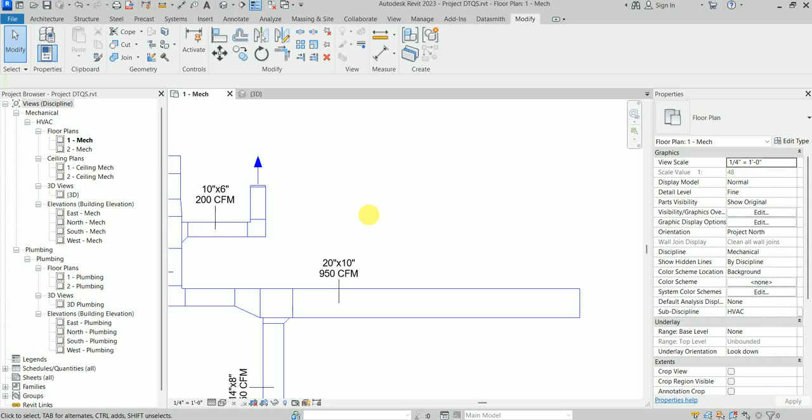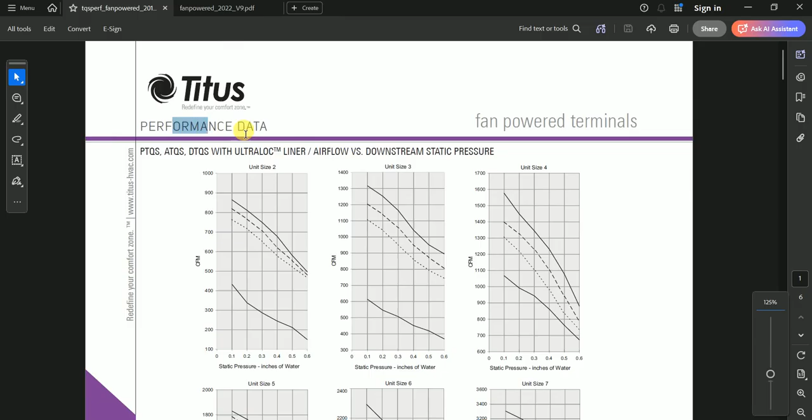This video is about Titus DTQS electric heat VAV fan power terminal box, and here we have its tabulations of this product, and this is the complete dimension, and these are the different sizes and their description.

So this video is about the features of the family I've created. Although this family can be found on the Titus website, I just wanted to create the family in my own version, my own kind of family.

So I have the family, and the thing is that most people make use of these fan power terminals, or even the VAV boxes without fan powers, just like a mechanical equipment category. But I make these families as a duct accessory, and the reason why I make use of duct accessory is why I wanted to make this video and show you the feature of how it is very easy and convenient to use duct accessory for these families instead of mechanical equipment.

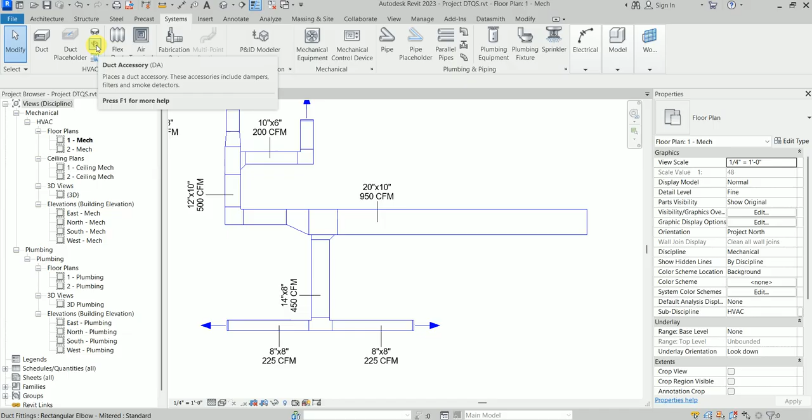So if I click here on duct accessory, or even if I press DA by keyboard, it's going to bring this family here. Now the thing is, in this family, I place it here.

You can see there it has this inlet, and from here it's outlet. So this side is coming from the equipment and this side is going to the terminals, right?

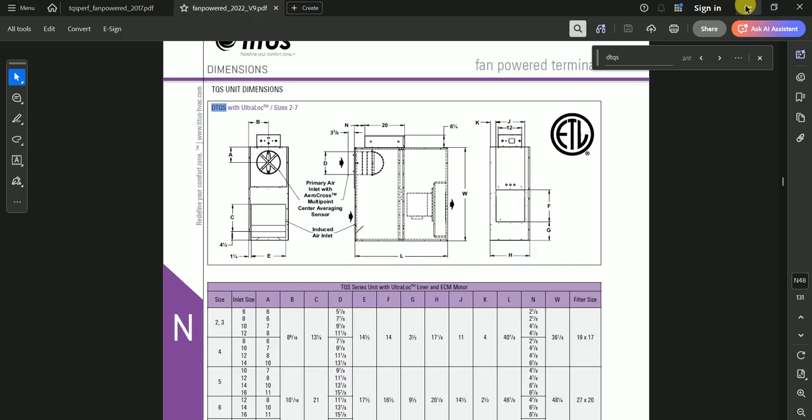So the thing is, here you might have noticed that both of these connectors are in line, and there's a reason why they are in line, and that's what I'll show in the video.

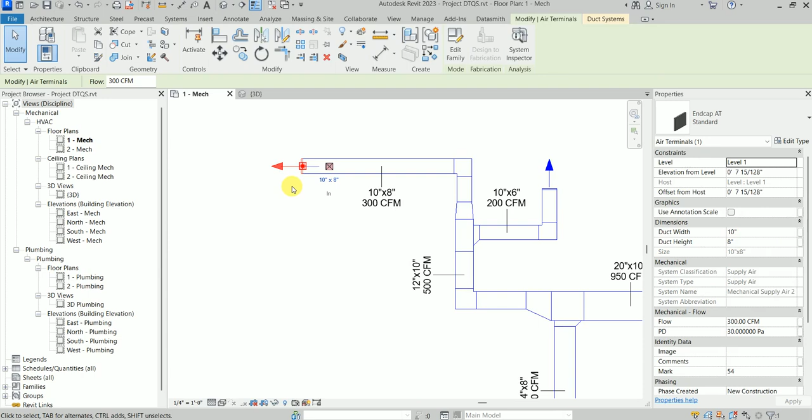So I have here the duct network. All right, so as you can see, these are my terminals. All of these with the arrows are my terminals. I just use them conveniently to bring the airflow inside my duct. As you can see here, all of the ducts have the flow rate and the sizes mentioned here.

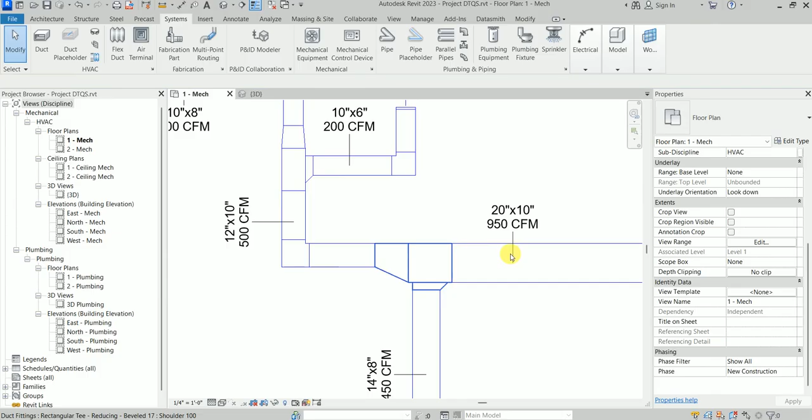And also I have these duct fittings which are being selected from the proper ASHRAE table in here, like here, and then here also I have this SR513, and this one the bullhead tee here properly.

And so if I go to duct systems, I'm having the proper calculation of the static pressure of this complete part of the network.

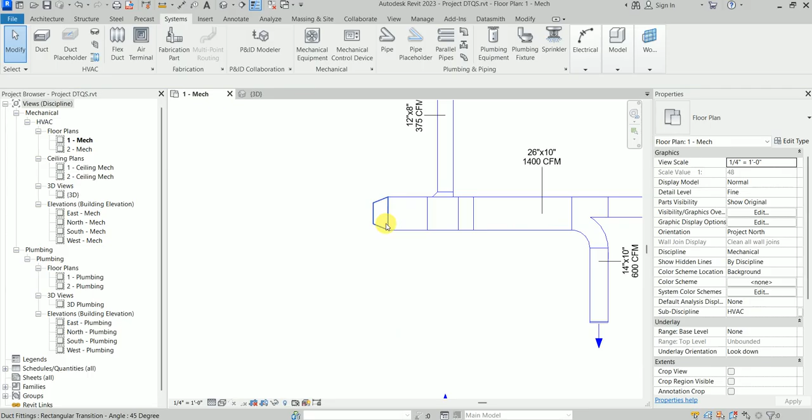Then I have another network here, right? And here also I can bring my flow rate and the duct size. These are my terminals with the airflows.

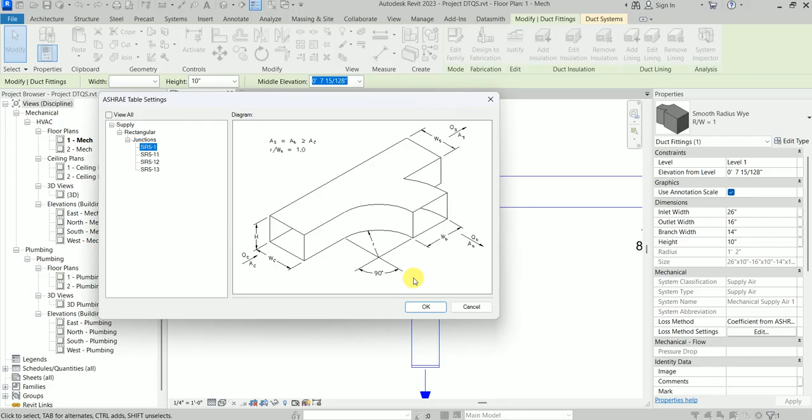This is another fitting. This is a smooth radius wye, right? And then this is the bullhead T.

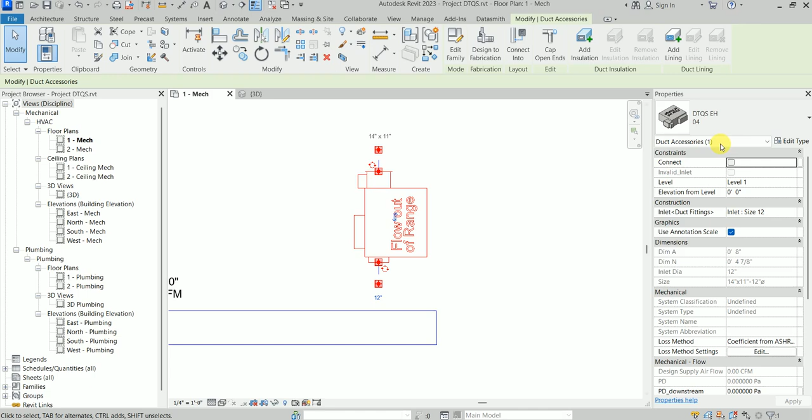So let's get back to here, this DTQS. So here I have sizes from 2, 3, 4 up to 7. So I have like 6 sizes of this, which I have made all of the sizes, right? So I have from size 2 to size 3, all right, size 4 and 5 and 6 and 7, like so.

So I wanted to just show you the features of this family, what I have made here. This is the DTQS family from the Titus fan power terminal box.

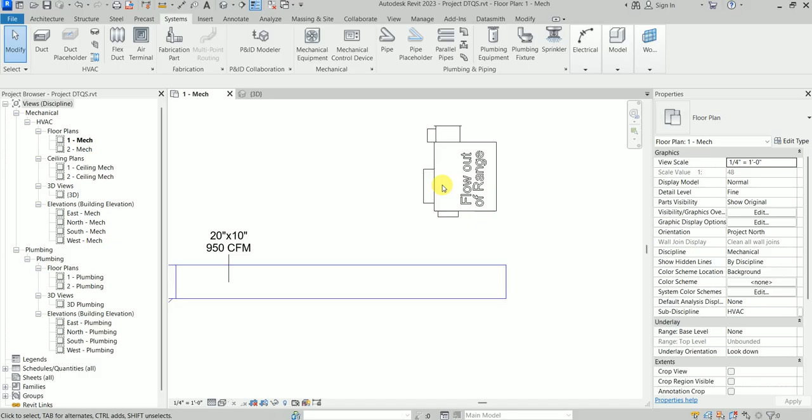Now the thing is, let me show you first all of these sizes, how they have different inlet sizes. So the inlet is here, right, with the round connector. So the inlet can be different on one particular size.

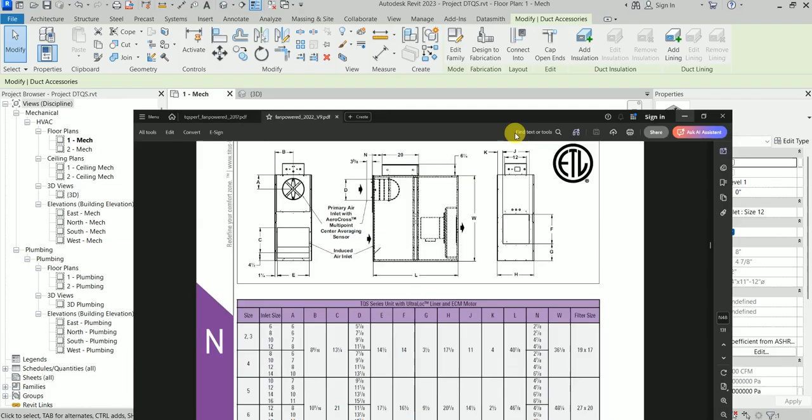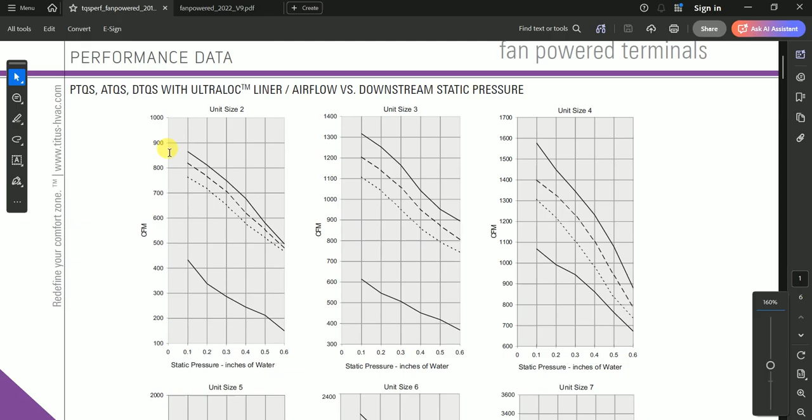For example, for size 2 and 3, they can go from 6 to 12. So I have here. And then we also have to select it based on the flow rate range given by this chart, right? So we have flow rates. For example, this one goes from about 500 CFM to something like 860 or 870 CFM, right?

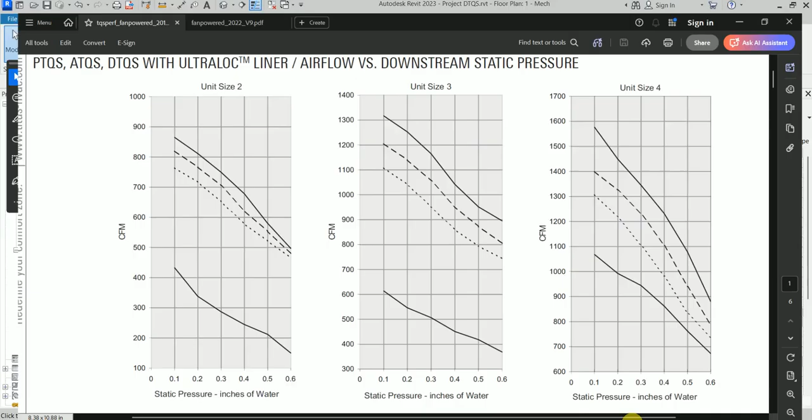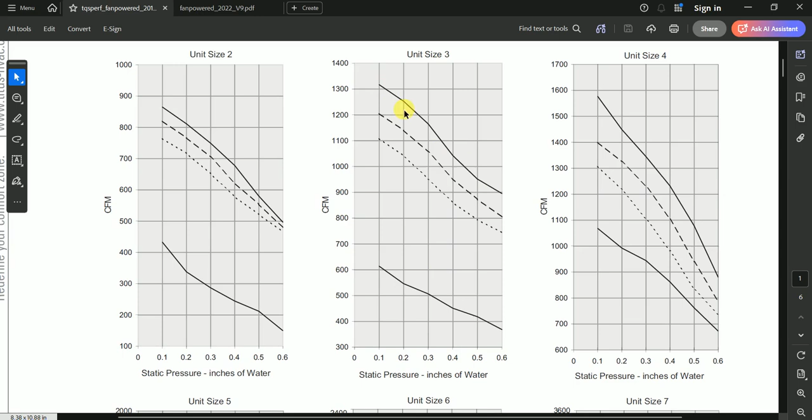So this covers everything regarding the flow range and everything regarding the inlet size. Now the thing is, let's say since I have this 950 CFM here, I'll be selecting, for example, and I don't need to look into this again and again, because all of this information I have given inside the family as minimum flow and maximum flow in the type. So if I select this, all right, so I have the minimum flow and the maximum flow.

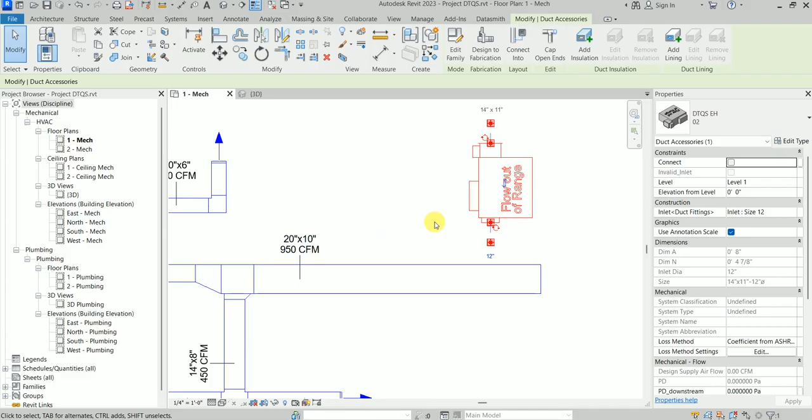As you can see, this flow is out of range, so I'll go to type 3. Type 3 is from 900 to 1315, so I can connect it here. I'll delete this and bring a new instance, and from here I'll select size 3 and bring it here.

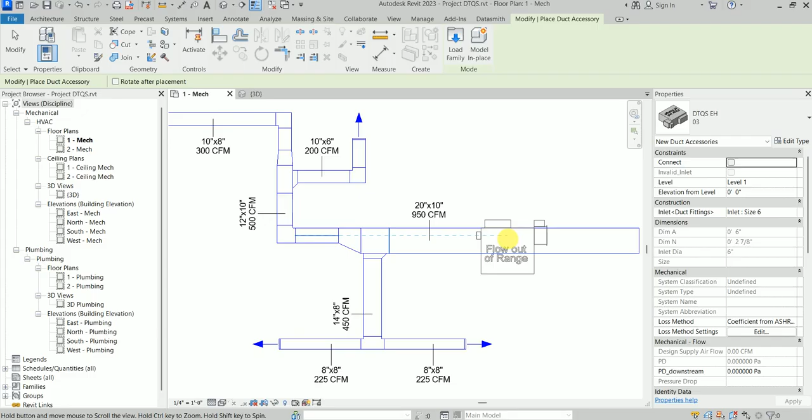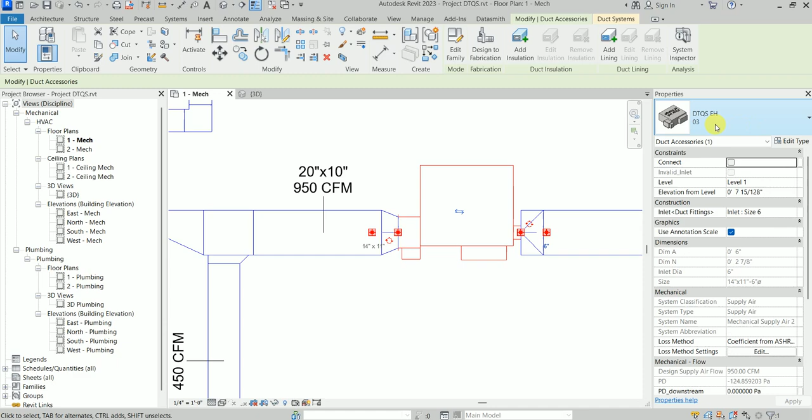The important point to note here is that the round connector should be towards the equipment and the rectangular should be towards your air terminals. So I'll bring it here and click inside and it will be connected. Now you can see on this side I have round duct, and on this side I have rectangular duct.

And because this is size 3, I can have different inlets here from 6 to 12 inch. So I can select this from here, 6 inch, 10 inch, and then I can select 12 inch.

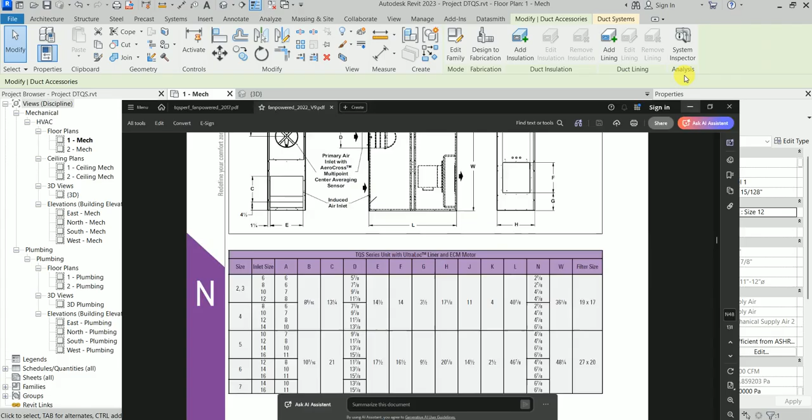I've also made a feature in this family that if you select it and look at the inlet size drop down menu, it will show you all the sizes from 6 to 16 inch. But the thing is, this particular type only takes from 6 inch to 12 inch.

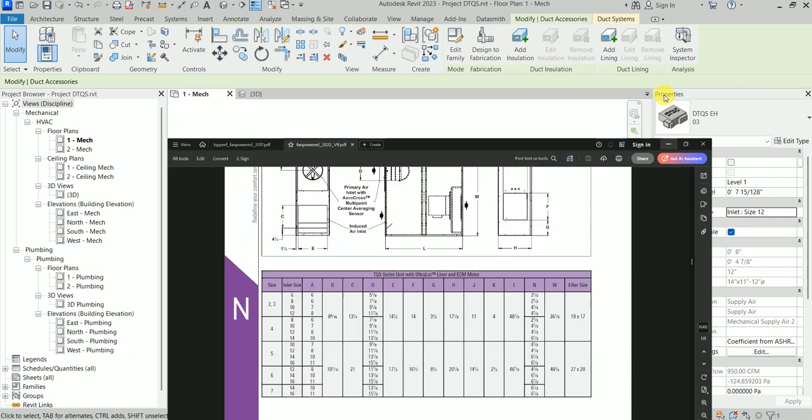So for example, if somebody by mistake chooses to go for 14 or 16 inch in this particular type, I have added a kind of indication that will give us a warning that a wrong inlet size has been used.

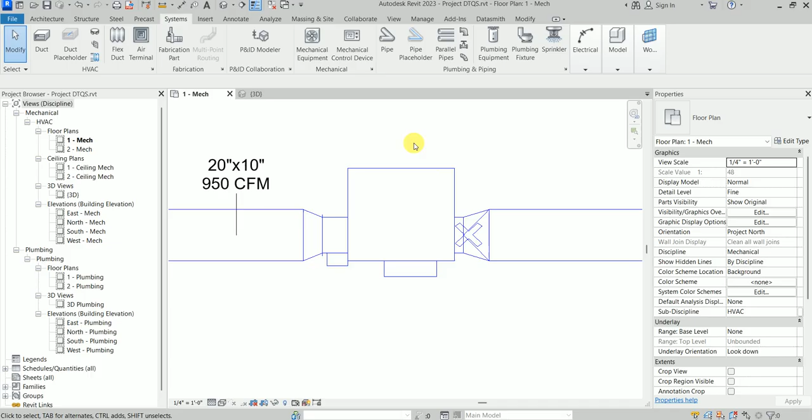So let's say I go to size 14. In that case, this cross appears here, and this shows up both in the plan view and in the 3D view - you can see this cross going all the way. This gives an indication that there's something wrong with the inlet size, which you have to correct. If you choose the proper size, this will disappear, like it did here.

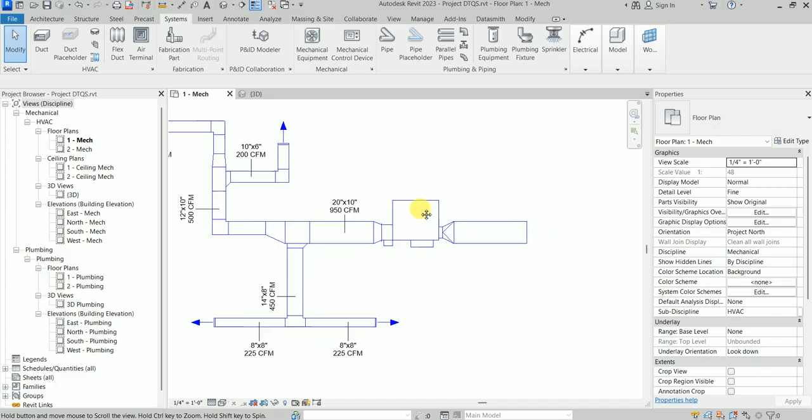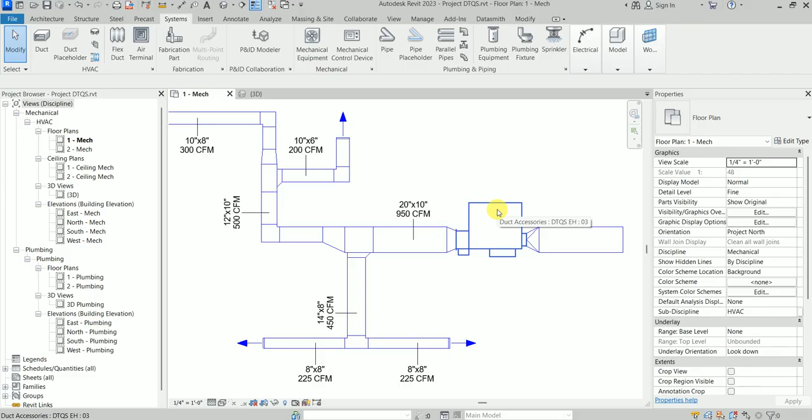Now the next thing is, like I showed you, the minimum and maximum flow rate here is 900 and 1315. But what if for this particular type the flow rate goes beyond this minimum and maximum range? If it's either less than 900 or more than this value, there will be another indication to let me know that this size is not as per its flow range.

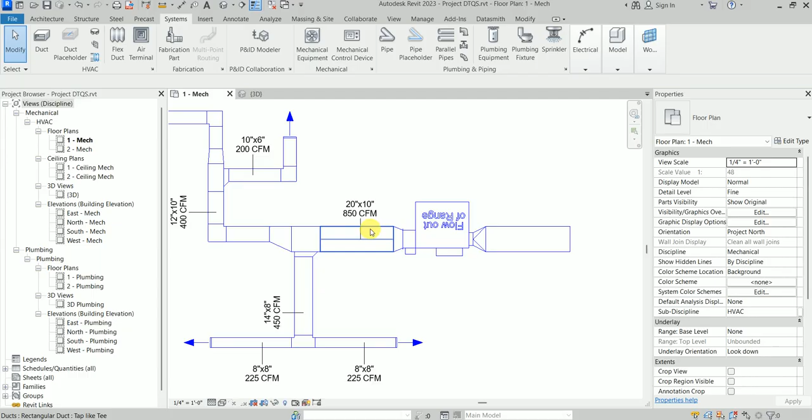Let's say I have here 300 CFM. I'm going to decrease it to, let's say, 200 CFM. Now it has become 850. And as you can see, immediately there's a kind of warning here that says flow out of range. You can also see this in 3D - this text appears, flow has become out of range, so you have to correct it.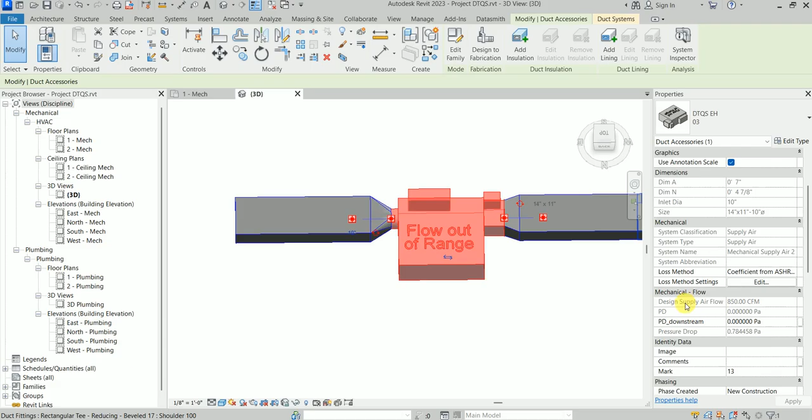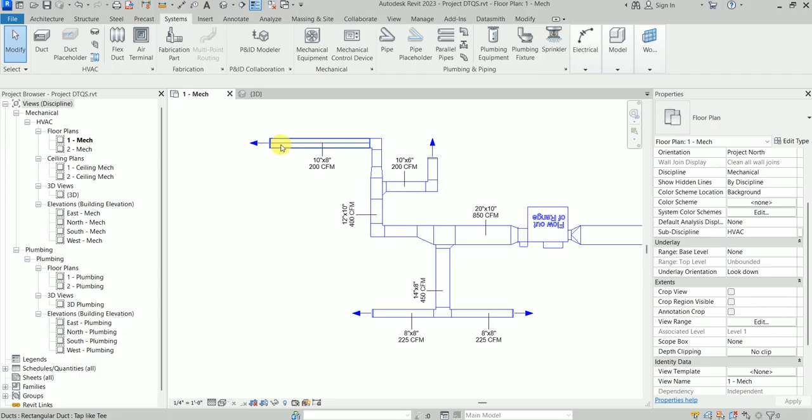If you select it, you can see the flow rate as well - also in design supply airflow it's 850 CFM. This lets me immediately know that there's something wrong, either with the inlet size or the flow rate itself. So I'm going to re-enter 950 CFM here, and you'll see that this warning just disappears. This is a feature everybody would want to have.

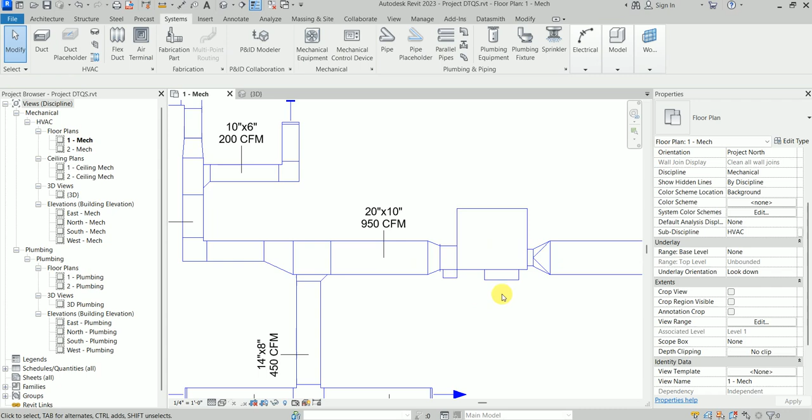The final thing I wanted to show is, like I showed you in the beginning, these two are not in front of each other, they are not aligned. The reason I made it like this is that's how it gets snapped to the duct and connected. Otherwise, if it's mechanical equipment, you need to bring it to the proper offset level and then connect one duct to one side and the other duct to the other side.

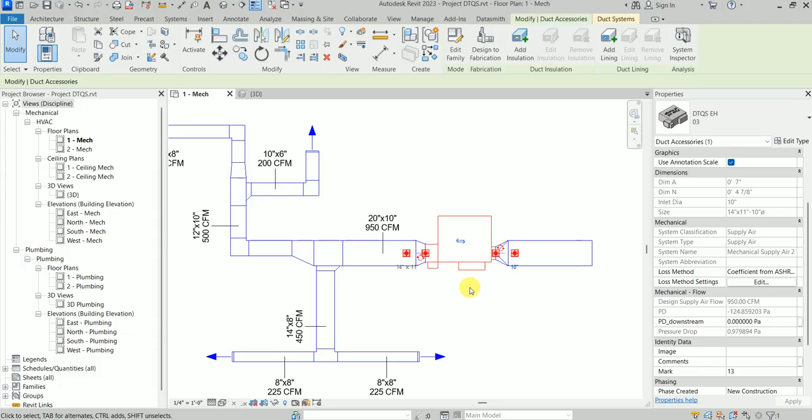This gets very hectic and long work, so too much effort is required. So for this, you just have a duct here. Let's say you have a duct here, somewhere over here, right? On any side of the duct, you bring this inside, and then you just choose any size.

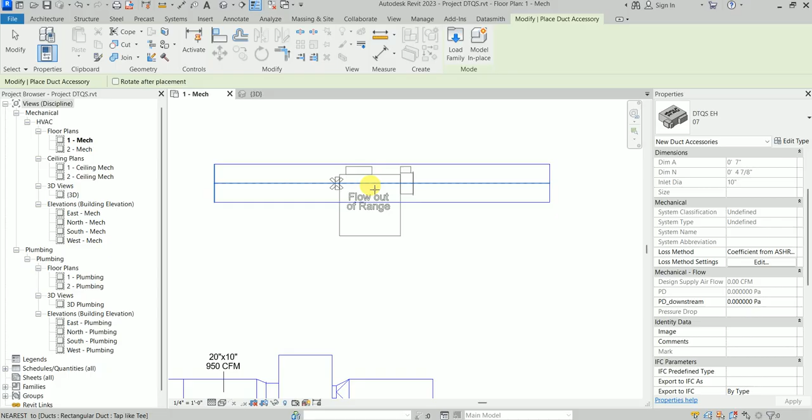Let's say I choose size 7, and then you do this. You just need to build the proper size here, so that this cross disappears. Right now there is no flow range here.

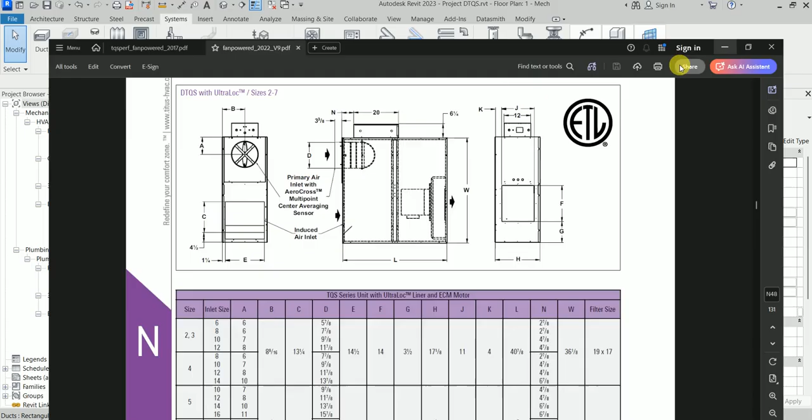Once the duct has a flow, this cross will disappear like I showed you. But the last thing is that these two are not aligned here. So for me to get it connected on both sides, I made it like this. But the moment your ducts are connected, like either here or here, what you can do is just press this button called connect, and then this will become its proper shape like it is in actual, right?

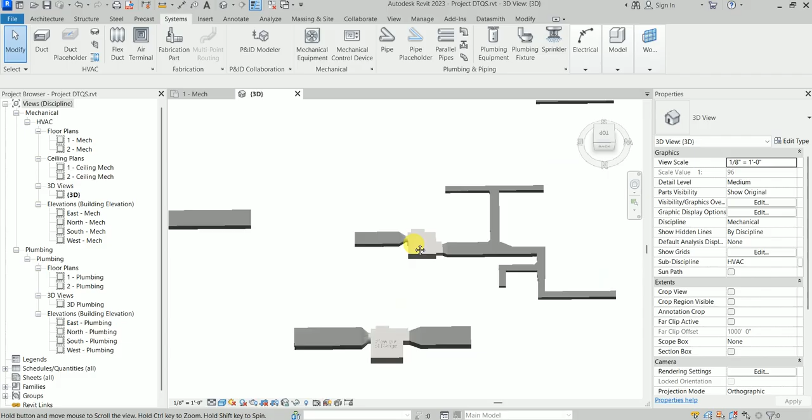So these are the features which make it very convenient to use quickly. You get the indication that the flow is out of range. You also get the indication that your inlet size is not proper as per the size of the inlet. So this becomes very useful.

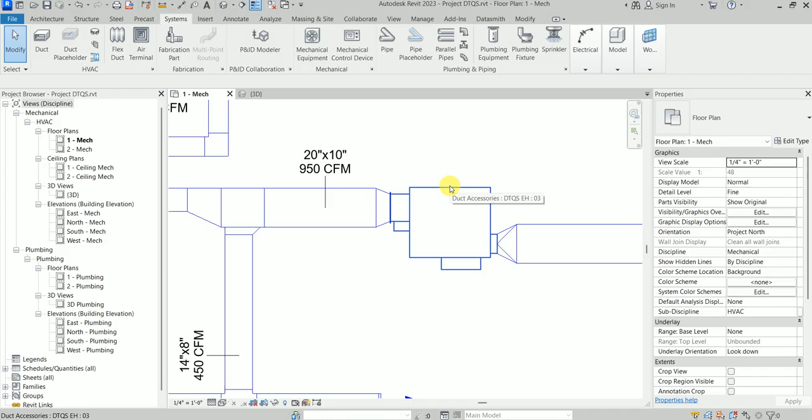Right now it also has an electrical connector which I have removed from this video for the sake of simplification. But it also transfers the flow rate on the other side of the duct, like it's shown here. So if I select this and go to edit type, I'll see the flow ranges minimum and maximum.

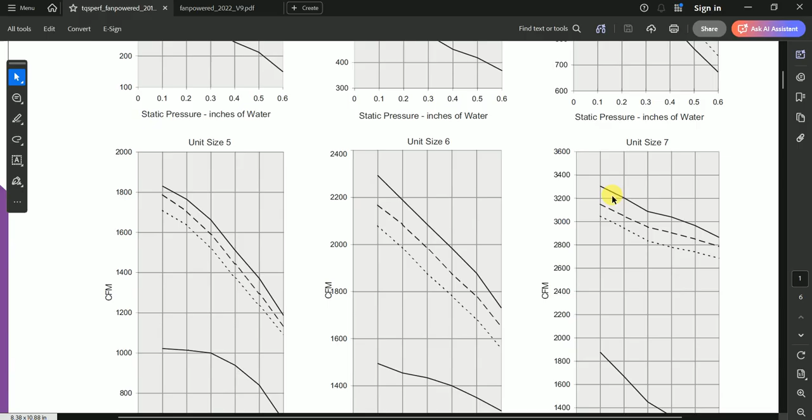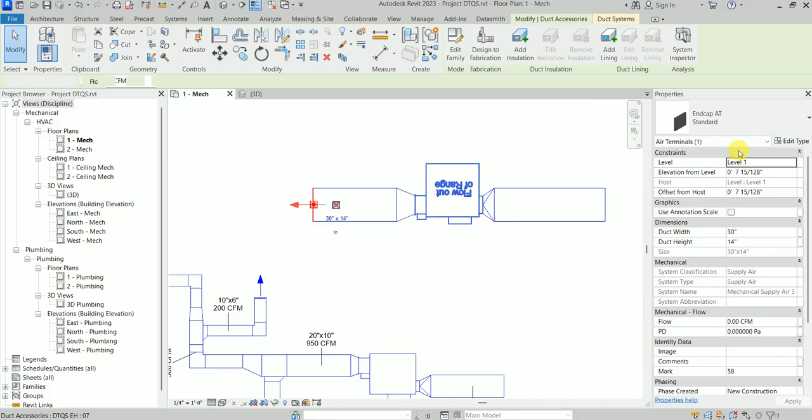Which, by the way, I have taken from these charts, right? So this chart has minimum and maximum, something like more than 2800 and going towards 3300. So it's here, 2870 to 3305. Let's say if I bring a terminal to this side and connect here, I just give some airflow rate value which is in this range. Let's say I choose 3100, so I'll give it here 3100.

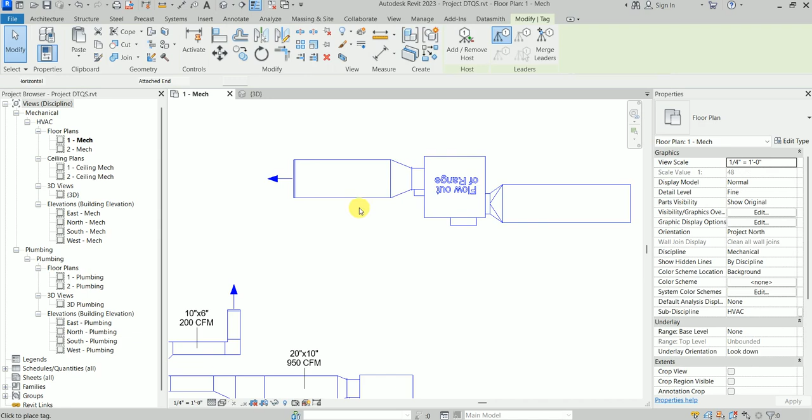And these the flow... this is not connected, I think. So if I give 3100, this warning disappears. Earlier I couldn't connect it properly, now it is connected properly.

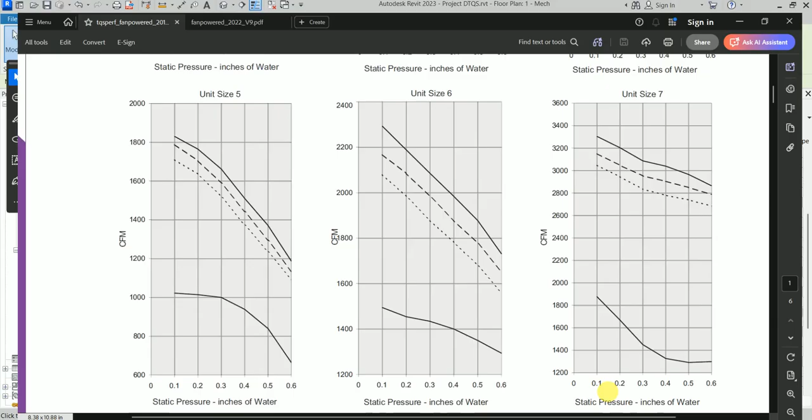And I can change, of course, this inlet size, which for this particular size is either 14 or 16, right? 14 and 16. So I can choose the size of this inlet, 16 and 14, for both sides. So this one is 14.

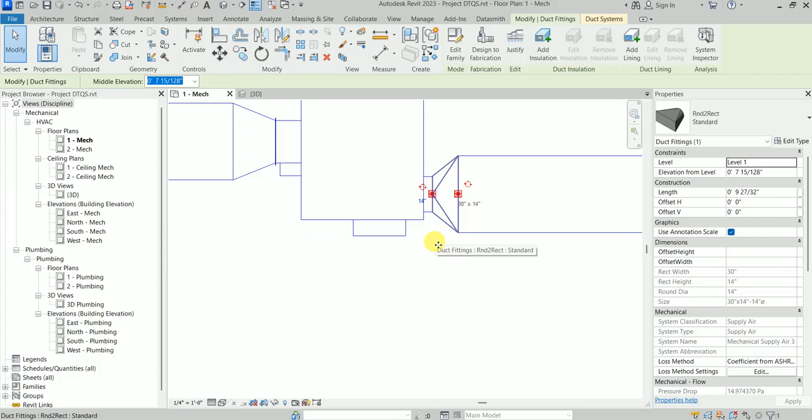And this is a duct transition which is rectangular to round, and this arrow is always towards the round, which gives me an indication that this side is round and this side is rectangular. And like I said, it passes the flow rate and it also captures the flow rate which is having.

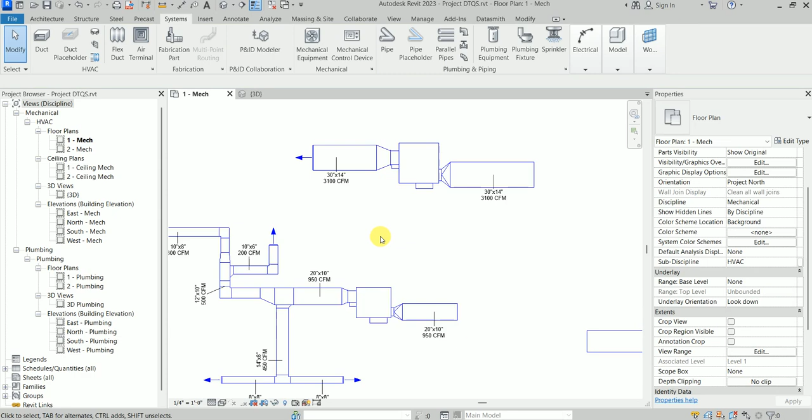This is the first video about this DTQS Titus fan power terminal. In the next video I will show you how I'm going to do the static pressure calculation for the complete network. If we have the complete network like this, for example, that I have here, this one is my AHU mechanical equipment, but this will be covered in the next part of this video.

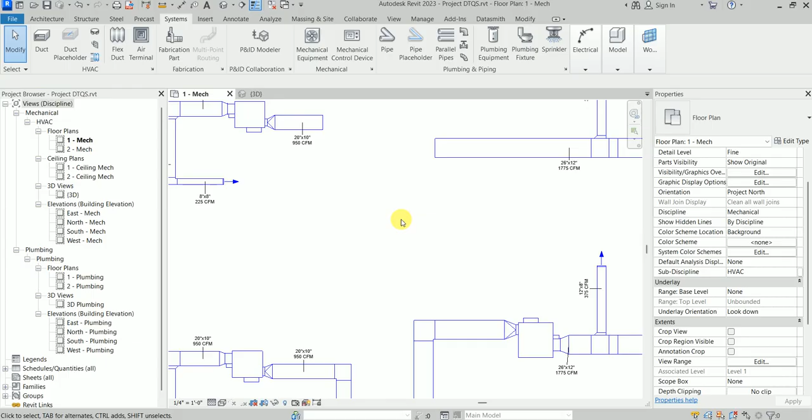So in this one I just wanted to show you the features with which I have made this family. That includes the indication of flow rate. It has the indication of the proper inlet size, and it also captures the flow rate.

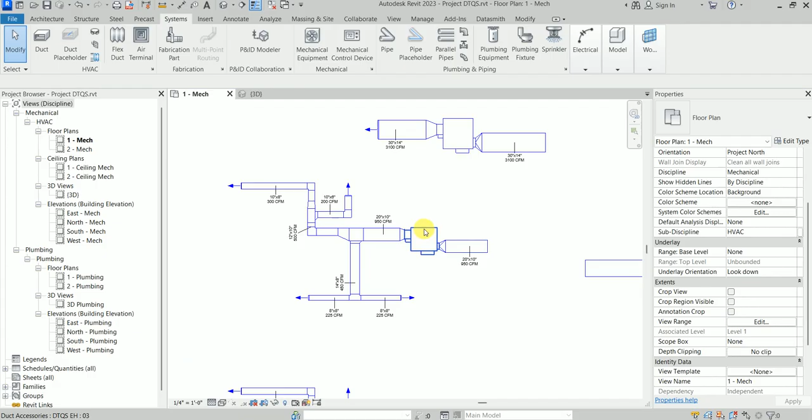And yeah, that's it. It's also very useful to be connected on a single duct, and then later on we just press this connect button for its proper alignment, or what you can say, proper offset, when this outlet is offset with some inlet, right?